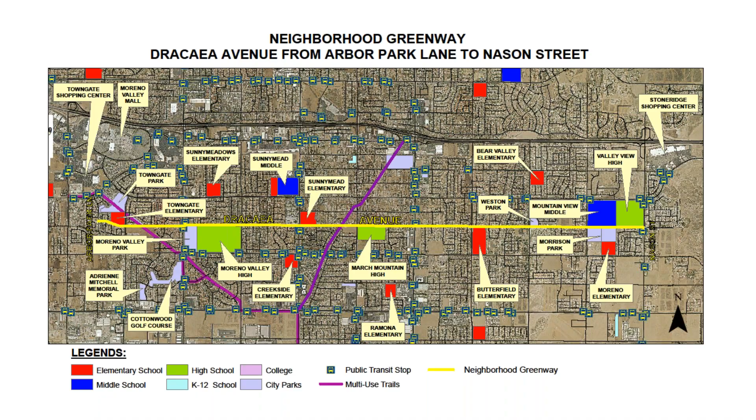This is a map of where it's located. It's a 4.5-mile corridor from Arbor Park Lane to Nason Street, and as you can see, there's lots of schools, lots of parks, and in purple you can see the multi-use trails. In red, there's the beginnings of a nice bike network.

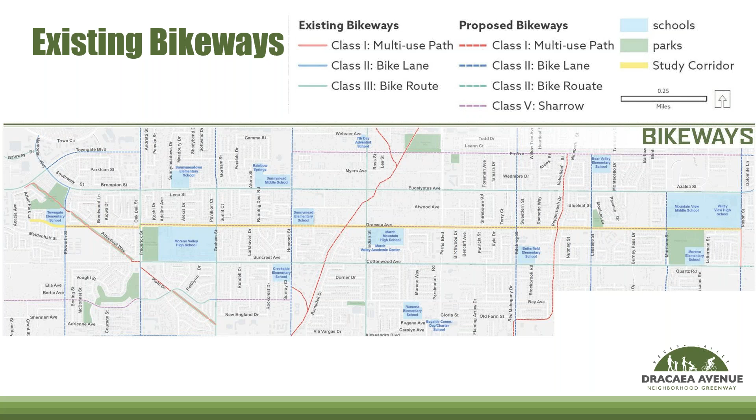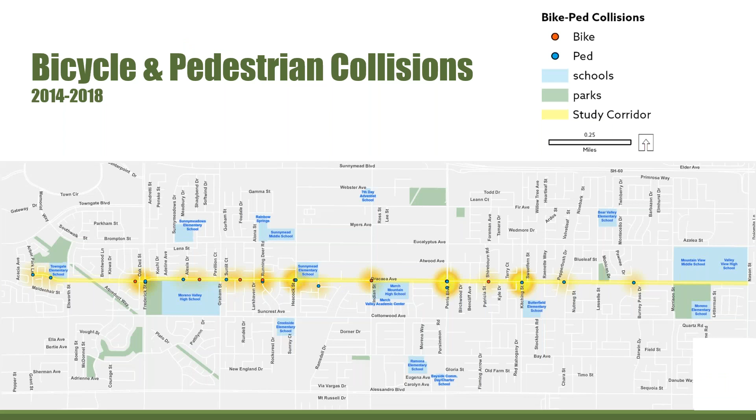There have been plenty of bicycle and pedestrian collisions, as you can see in this map, and even more motor vehicle collisions. There's a relatively high speed, 41 miles an hour, which is a lot for a street that doesn't really go anywhere—it essentially dead ends on either side. We don't want it to be a through street; we want it to be for the neighbors to get to their homes and to their destinations.

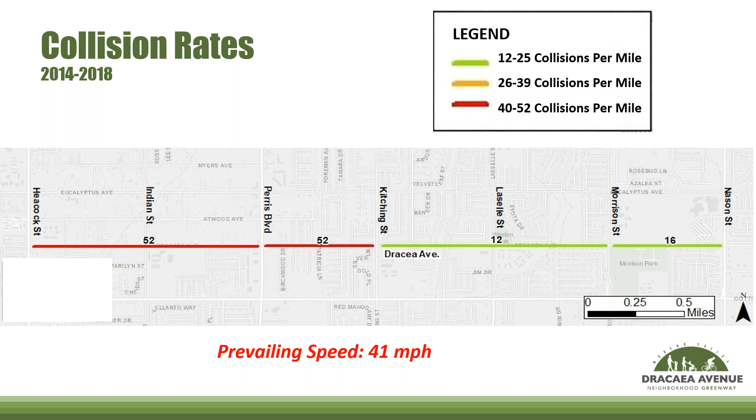On the right, in green, you can see there are 1.5 to 2 times the number of crashes compared to the average for the region. On the left, in red, there are 10 times more crashes than the regional average. So this is a very high crash location. Not only are we going to make things better for walking and biking, we're going to make things better for driving—basically, it's a win-win.

Now let's dive right into the process. We kicked off in January, did workshop 1 in March, then COVID happened. We did work with existing conditions and research, developed recommendations, and here we are in workshop number 2 in June. We'll do workshop number 3 in the fall, and finish up early next year.

We want you today, after this workshop, to not only tell us what you want to see, but where you want to see it. We have a map for you on the story map, and you can pin locations where you want to see changes.

The results of the vision exercise—what people wanted to see: reduced conflicts, quality bicycle corridors, high visibility crosswalks, shaded plants and trees, adequate street lighting so they can walk at night, reduced motor vehicle speed, pedestrian beacons and other types of signalization, and finally, traffic signs to alert drivers to the presence of school children.

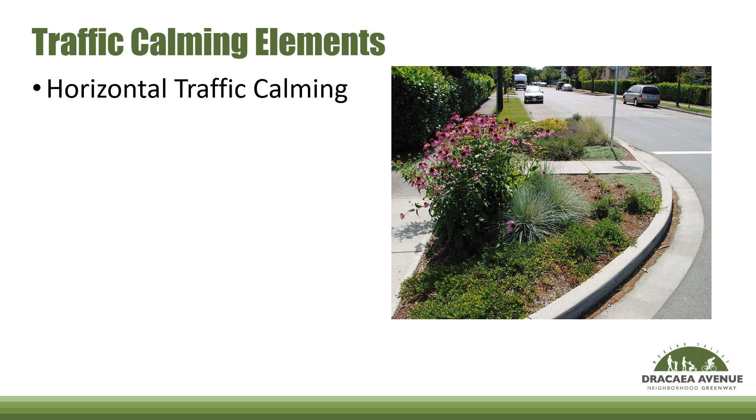You could do traffic parking chicanes where motor vehicles zigzag along the neighborhood, and curb extensions as you can see in this photo. There's various types of on-street edge friction you can do, such as chicanes and median refuge islands, which have a 73% collision reduction, the highest of any traffic calming measure.

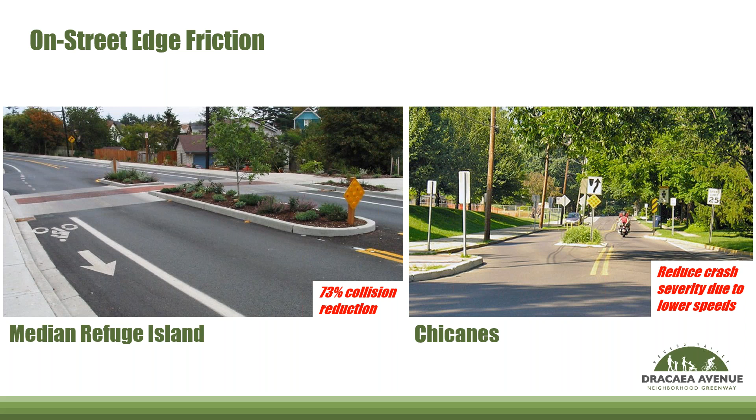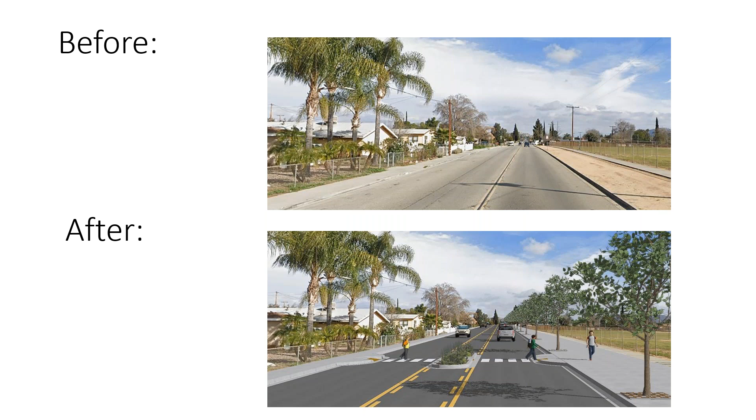So they're pretty impressive. Now, if we did this to Dracaea, what would it look like? Here's a before picture of Dracaea Avenue, and here's an after picture. You can see the curb extensions and the median refuge island in the middle of the street.

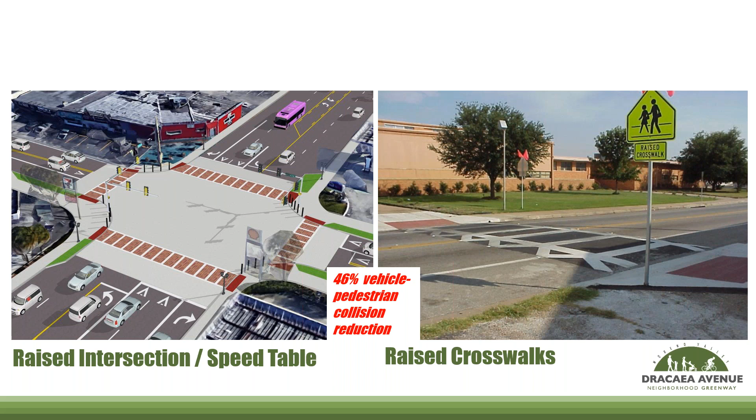Next, we come to vertical traffic calming. This could be raised intersections or speed tables like you see on the left, or raised crosswalks. They have significant pedestrian collision reduction—here you can see it's 46%.

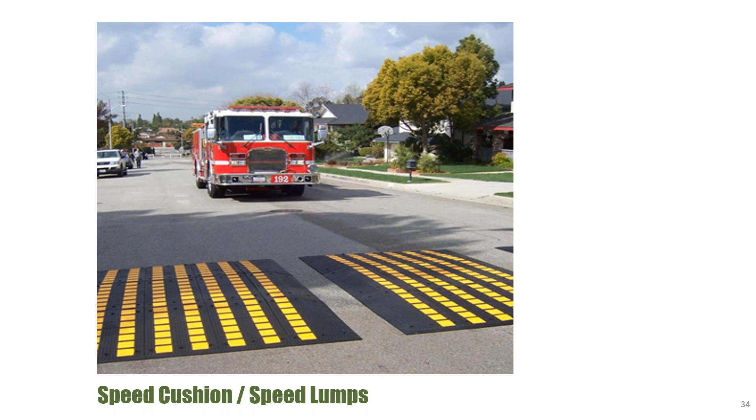These are speed cushions or speed lumps, which are pretty innovative. Emergency vehicles like this fire truck are wide enough to actually go into the gaps, so they won't be slowed down, but regular motor vehicles will be. So these work quite well. And there's other traffic calming elements for the neighborhood greenway.

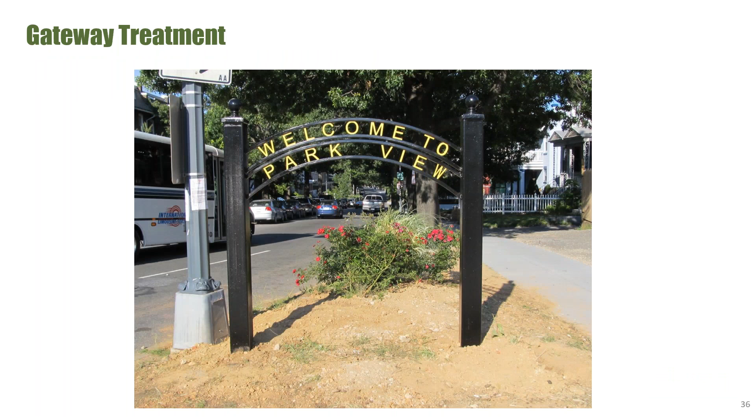This is one example, a gateway treatment. It's going to be really nice on either end of Dracaea. Speed feedback signs could work well.

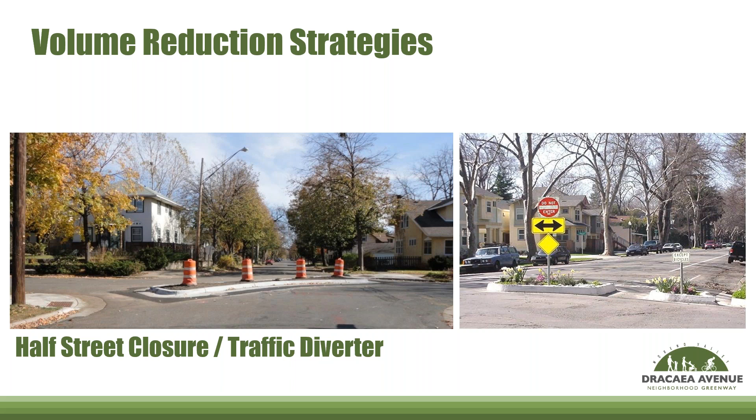Various volume reduction strategies could be implemented, such as half street closures or traffic diverters, as shown in these photos. You could do various signalization options. These really help pedestrians get across the street, especially at school locations.

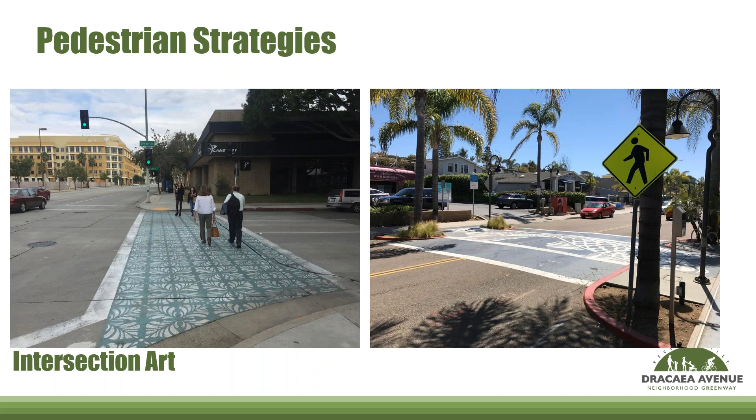You could put in high visibility crosswalks, as shown here. And if you want to get really creative, you can turn those crosswalks into intersection art, as you can see here. There's various bicycle strategies.

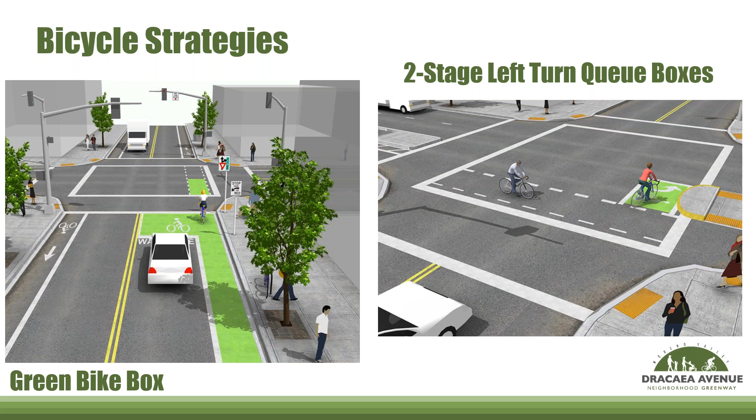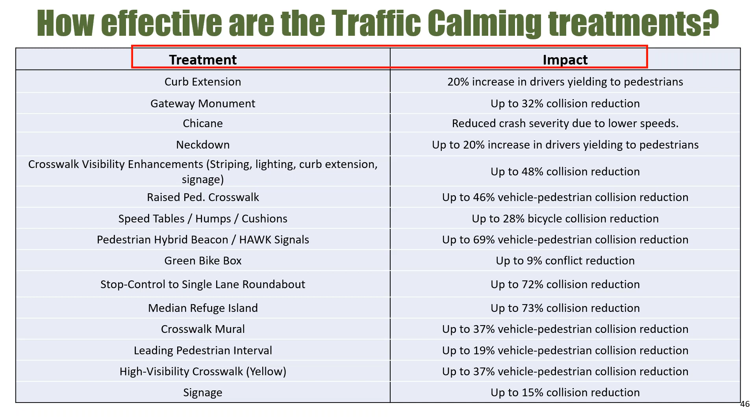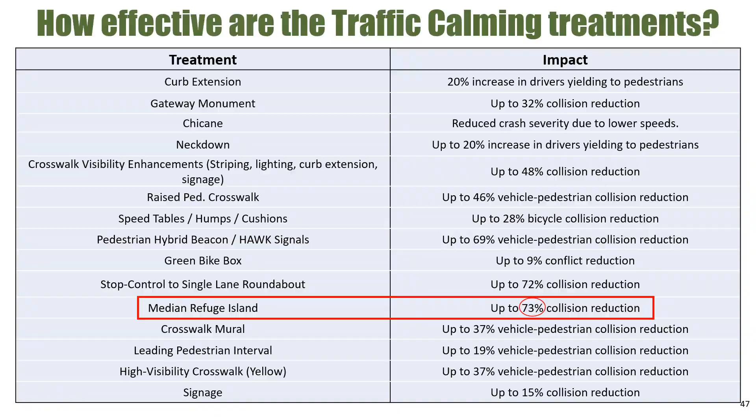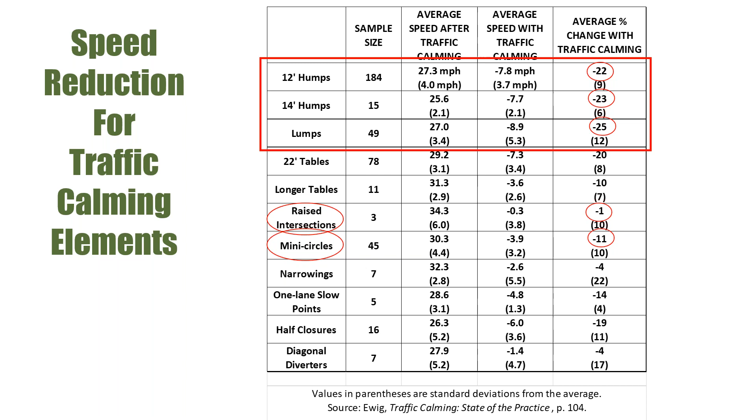What are the next steps? Well, this was workshop number 2, today. Next, we're going to do workshop number 3 in the fall. We're actually going to dive into a design concept, more detailed. We're going to finish up the project early next year.